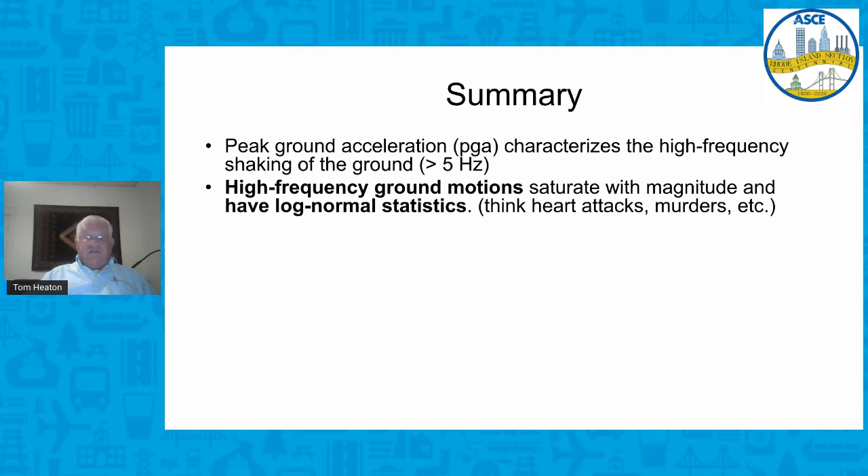And if you look at the statistics of the high frequency amplitudes, the saturation means that we can simulate the probabilities of those motions using standard statistical models, log normal statistics in particular. And this is the kind of statistics that's used in the insurance industry for life insurance for things like heart attacks. You could use them for murders and the like. It's another lecture to talk about why they work so well. They're fairly simple and they make statistics easy. And basically, if it is a normal distribution, all you really need to know are the mean, which in our case is a rate, and a standard deviation. That's what determines a normal distribution.

But low frequency ground motion statistics, the part of the ground motion which is best characterized by, say, the maximum amount that the ground displaces during the shaking, those are characterized by heavy-tailed power laws, which is a different kind of statistical distribution, which is the distributions you see in epidemics like bird flu, or, I made this slide prior to COVID. Obviously, COVID's changed everything. Power laws work for wars. They work for all kinds of, they work for storms, believe it or not.

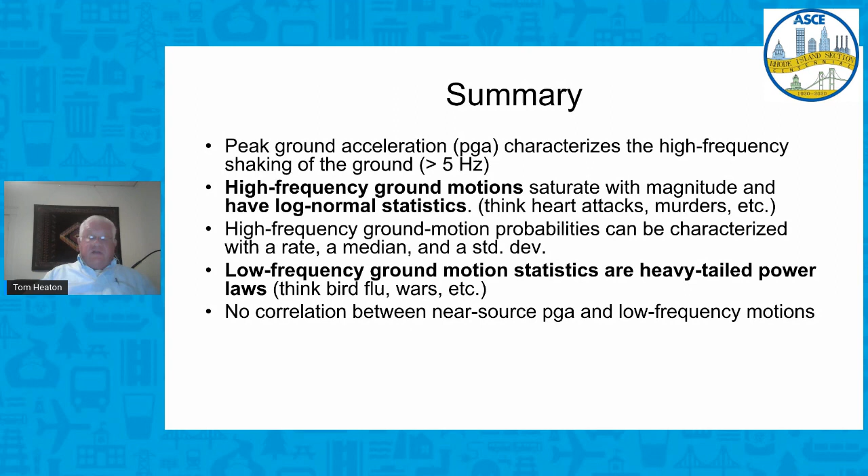And they have very different kinds of statistical properties. And I'll argue to you that when you get in really strong shaking, there's absolutely no correlation between the peak high frequency motion that you see and the peak low frequency motion that you see. They're unrelated to each other.

And so in the United States currently, in probabilistic design of tall buildings, which are long period structures, and base isolated buildings, also long period structures, we use design motions currently that are smaller than is widely accepted within the geophysics community. But since engineers and geophysicists don't actually talk to each other, they go to different meetings and speak a different language, most people don't really understand that this difference occurs.

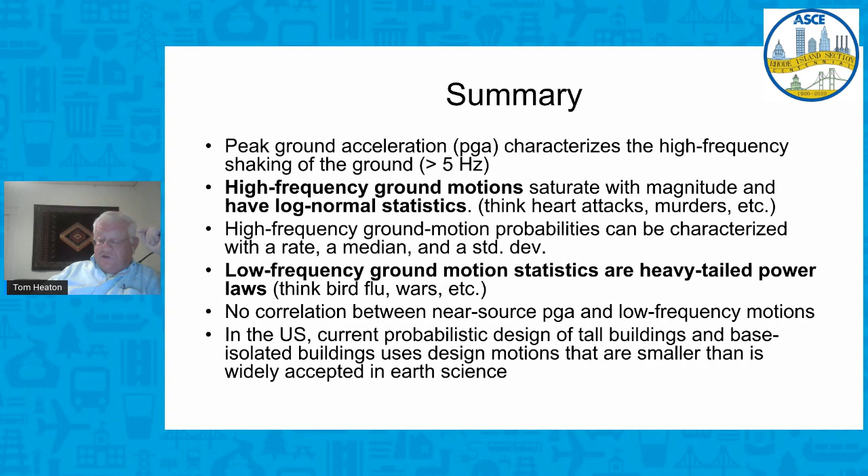So here are the key issues. Although ground motions can occur at any distance and be damaging, I'll concentrate on what happens close to the earthquake rupture, within 10 kilometers of the rupture. It just makes everything much simpler. And it's those close-in motions that are the most violent and damaging.

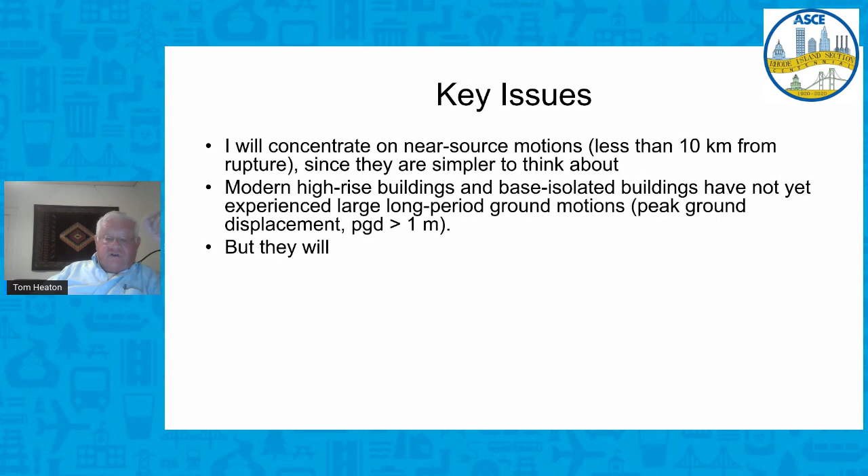And if you look through our history of high-rise buildings, it's a pretty short history. Same for base isolated buildings. I mean, high-rise buildings, less than 100 years, base isolated, less than 30 years. Up to now, we've not experienced any large, long period ground motions where the ground moves more than a meter. And so those systems have worked well, but sometime in our future, and I can't tell you when, they will have large ground motions. It's inevitable. That's the way Earth plate tectonics works, is big earthquakes have big slips.

And the question that I'm going to ask is, is statistical prediction of those long-period ground motions actually technically feasible? And I'll argue that maybe we could do that, but we're certainly not doing it now. And it will look very different from what we're doing for short period ground motions, which is basically what the current procedures are. And my real question is, 100 years from now, will tall buildings, long period buildings, be designed differently than they are now?

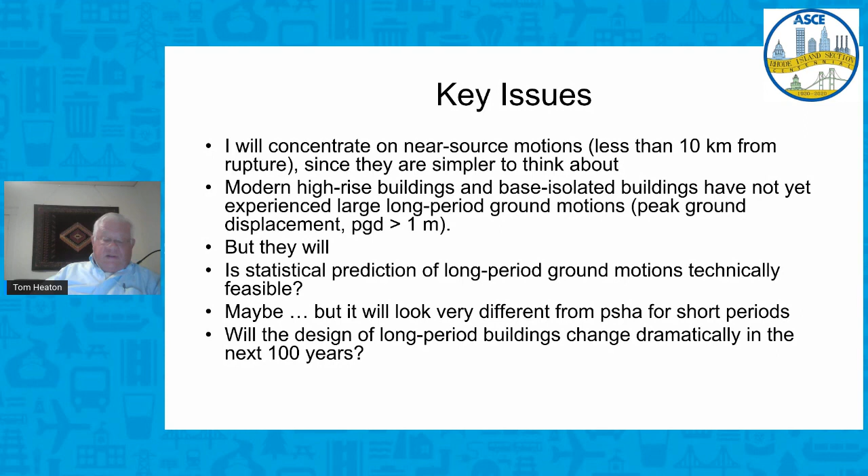And I think the answer to that will just depend on whether or not we have some large earthquake in a city. If we have a large earthquake in a city, no one will pay any attention anymore to performance-based engineering. They'll just say, fix that problem. What were you thinking? And we'll have a completely different way to approach things.

So I apologize. Probably some of these next slides are overly simplistic for you, but let's go through them anyway. So current building codes, building codes are mostly a bunch of rules based on the type of building you're looking at and what kind of seismic zone you're in. And those rules have been developed over lots of decades of looking at earthquakes and how buildings did in those earthquakes, and then fixing things that showed up in forensic studies of the past earthquakes.

And when you look at a building code that's built in that way, in essence, you don't really need to know anything about the earth. You just say, here's what buildings worked well, here's what codes worked well. You don't really need a seismologist to tell you what's about to happen. So that's been sort of the way building codes were done in the past.

But starting especially about the year 2000, performance-based earthquake engineering became popular. And performance-based engineering says, design your buildings according to a statistical model of hazard. So make a model of what's the probability of things happening. And currently the practice is to build so that the expected time between collapse of buildings is 2,500 years, which for most human beings is kind of the duration of written human history. Might as well be infinite, but it's an extremely long time.

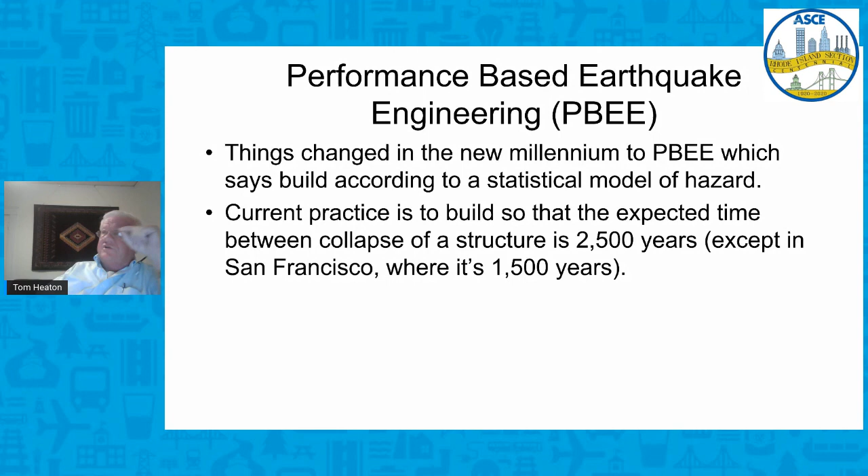But curiously, it turns out that the time for design for performance-based engineering in San Francisco is 1,500 years. And that's a little clue to tell you about what's actually going on here. The reason it's different is because San Francisco's closer to the San Andreas Fault.

If you actually built to the 2,500 years, you'd have to make buildings significantly different than we have in the past. So the definition of what's acceptable was changed just for San Francisco.

Some people claim it correlates with IQ of the earthquake professionals in San Francisco, but I don't know anything about that.

So when performance-based engineering was originally developed, it was advertised as a way to motivate owners of buildings to build to a higher standard than was being used at the time, which now would be the International Building Code, or at the time that we went to performance-based engineering, it was the Uniform Building Code.

Performance-based engineering is utilized in construction of high-rise buildings mainly, and people could use the standard code, but they use performance-based engineering because it typically reduces the cost. That's the way things happen currently.

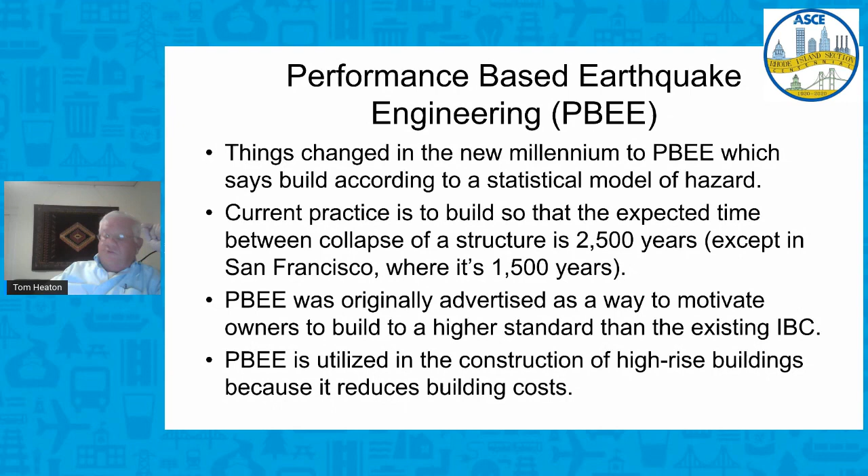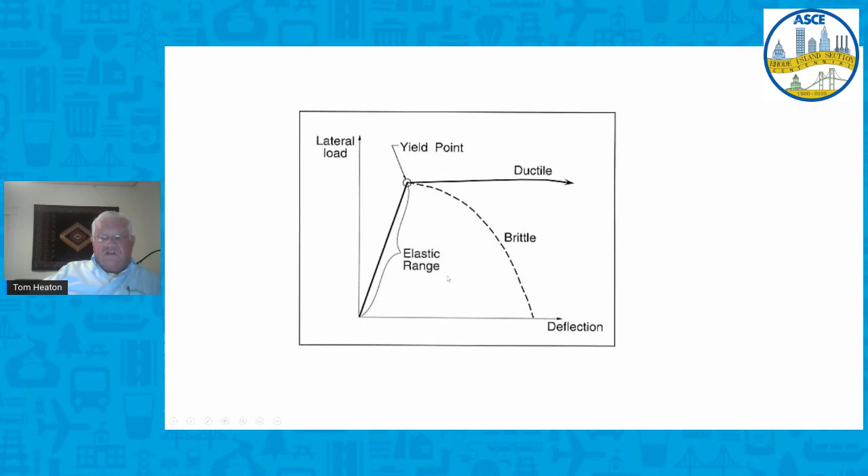If you decrease the load, the building should come back down on a linear line. If the building actually starts to decrease its load, then we call the system brittle, and ductile systems are always better.

So just to remind you, there are all kinds of different building types, but the most common are shear wall construction. Often these are buildings up to about 7 or 8 stories. We've got lots of these at Caltech. Probably the best of them are just simple concrete boxes with holes for windows and doors. These tend to be very high yield strength, very high mass, very stiff buildings.

At the other end of the spectrum are frame buildings where we've got columns and beams. These buildings tend to be used for tall buildings, and they're much lighter and more flexible than the shear wall buildings. You can go in between and put some braces, but I'll mainly talk about these two end member classes.

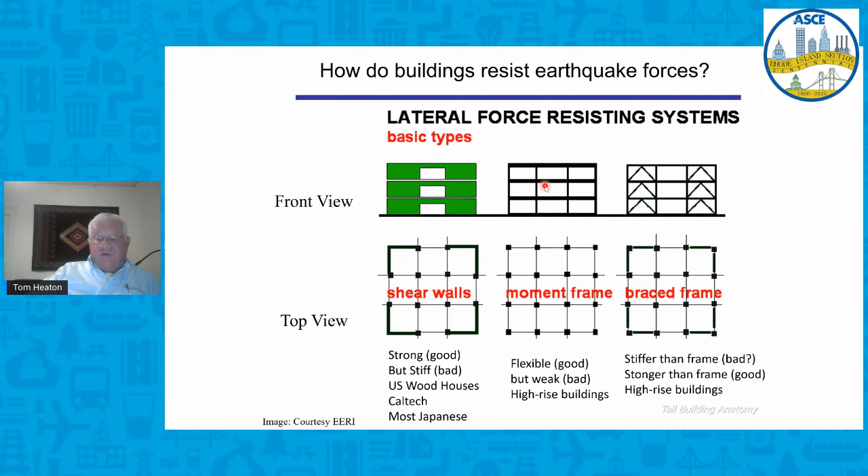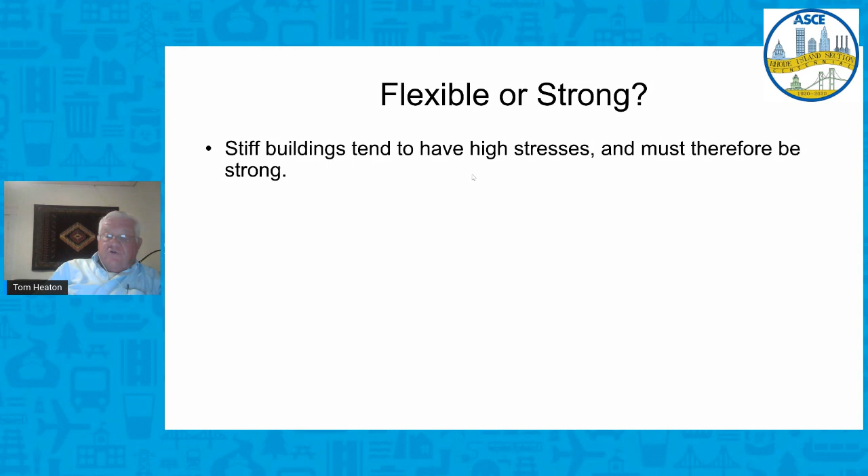So when you go to design a building, often the question is, are you designing a flexible building or a strong building? If you have a stiff building like the shear wall building, since it's very stiff, it makes very high stresses when you try to deform it. It has to move as a unit. And since it has high stresses, you have to make it strong.

But if you make it strong, it tends to increase its stiffness, which increases the stresses, which increases the required strength. It's kind of a vicious circle. If you try to make a building strong, you better make it really strong. People used to think there was a height limit on buildings because they couldn't build buildings strong enough to take the stresses in earthquakes.

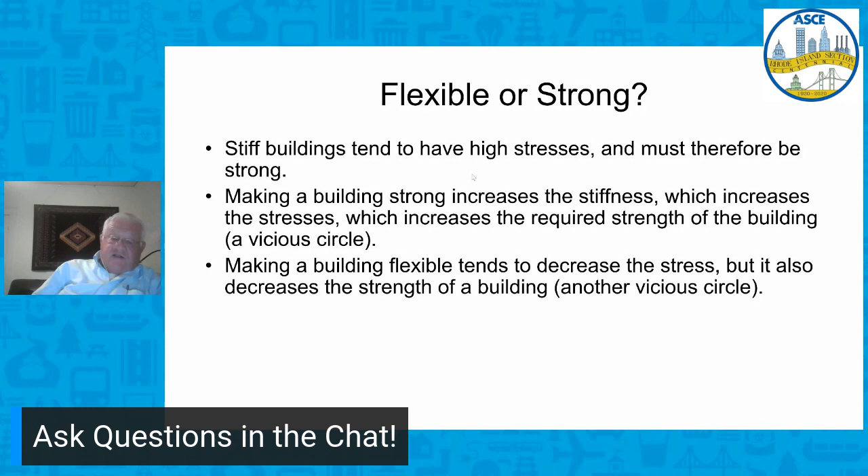But then it was discovered you could go the other direction and make the building flexible. When it's flexible, I'll show you in a second, it decreases the stresses in the building. But that's another vicious circle. The more flexible you make it, typically the lower is the yield strength of the building. So you can make it flexible, but you'll pay a penalty with the yield strength. Tall buildings are typically always designed to be flexible. It's hard to make them strong enough.

It's interesting, in Chile, they have never really gone with this principle, and they have very stiff tall buildings. Now they're going up to 65 stories, I don't know what they're up to.

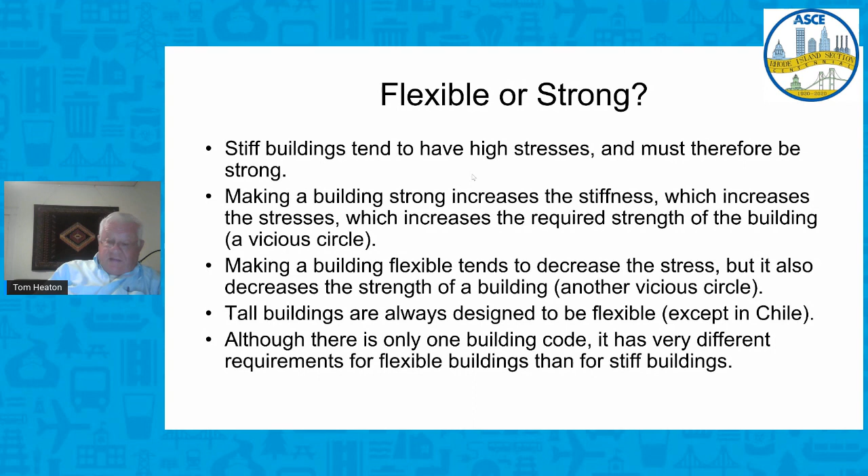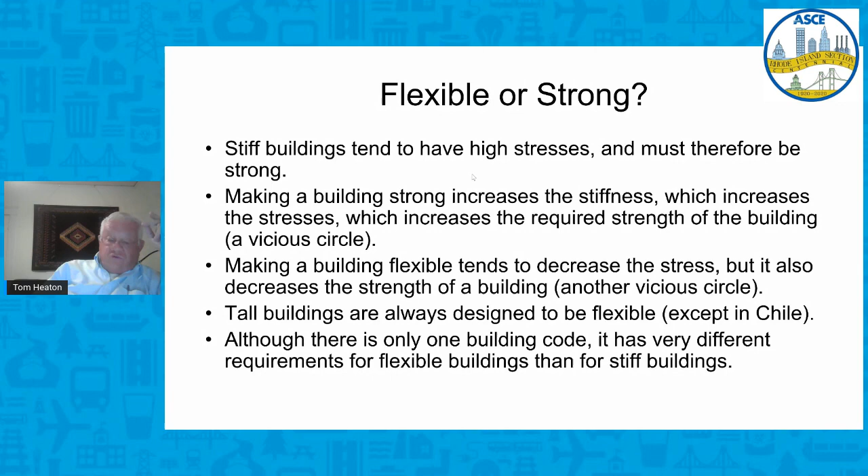Anyway, if you go to the building code, there's only one building code, like the UBC or the IBC, but it turns out it's as if there's two separate codes. Once you decide you're going to go the stiff route, you follow a certain set of procedures. If you go the flexible route, you follow a different set of procedures, and you'll end up with different buildings.

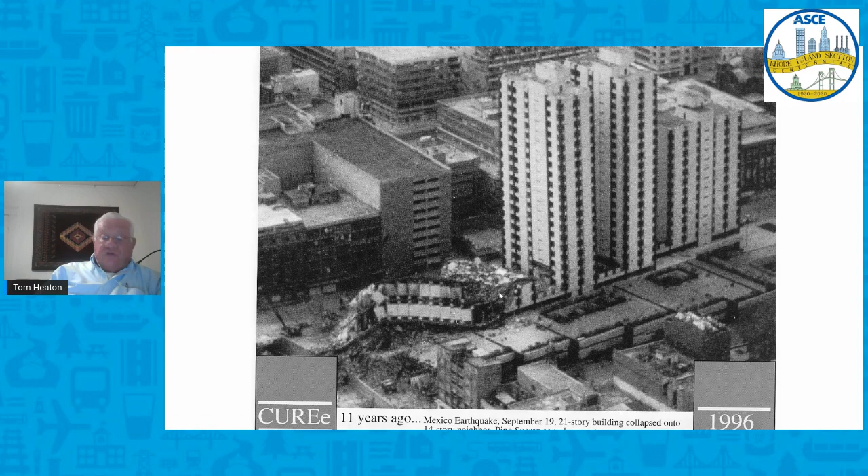So there's something interesting here. It kind of tells you, if you were going to predict what's going to happen to these buildings, they all had virtually the same ground shaking, and you have three very different outcomes. It just tells you how hard it is to actually reliably predict the outcome of collapse of buildings. It's not an easy thing to do.

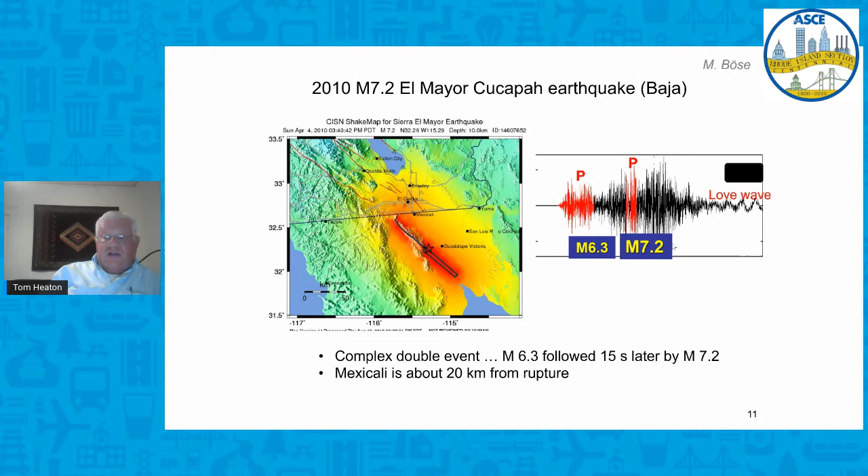You can see there's lots of high frequency shaking in here for maybe about 15 seconds between these two earthquakes. And then later there's something more subtle in this acceleration record, this kind of wavy wave that we as seismologists would call a Love wave. By the way, this geometry is very much like the Haitian earthquake situation.

I'm going to show you a video now from downtown Mexicali. In the background is an 8-story shear wall building, and here's a surveillance camera on a pole. You can see the earthquake starting, and the pole's probably about a resonant frequency of maybe 2 hertz here. You can see it shaking back and forth in that high frequency shaking part of the record. I'm sure you'd be excited. This is what you'd feel mainly if you were standing there. And pretty soon we'll get through the high frequency and get to the low frequency part of the shaking.

Now we're getting to the part where the low frequencies are coming in, that Love wave. And you can see how dramatically different the physics of the low frequency is than the high frequency. That 8-story building was fine, but that low frequency motion would have been dangerous to a tall building. This is just to illustrate the difference between high frequency and low frequency.

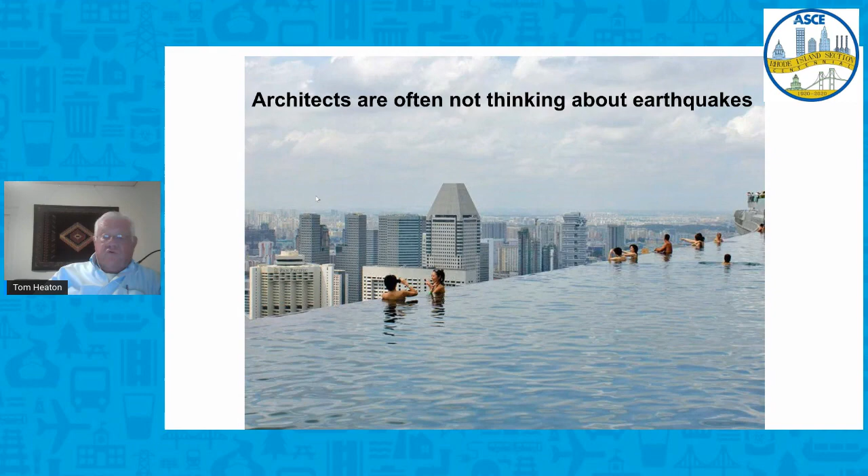I just want to point out that this is an infinity pool from a high-rise building in Singapore. I'm just pointing out, architects are often not really thinking about earthquakes. I don't think you'd want to be in this infinity pool for the kind of motion that we saw in Mexicali.

Mexicali is this city of 1 million people right next to this earthquake. It's not a wealthy city, and the geometry is a lot like Haiti. But it turns out when this earthquake was over, there were 2 fatalities out of a city of 1 million. Wow, they did fantastic. How did a poor city like that do so well?

Well, it turns out in Mexicali, Cemex, the company that does cement in Mexico, had been teaching all the residents how to make concrete block construction, just simple concrete shear walls with reinforcing in them and filling the void spaces.

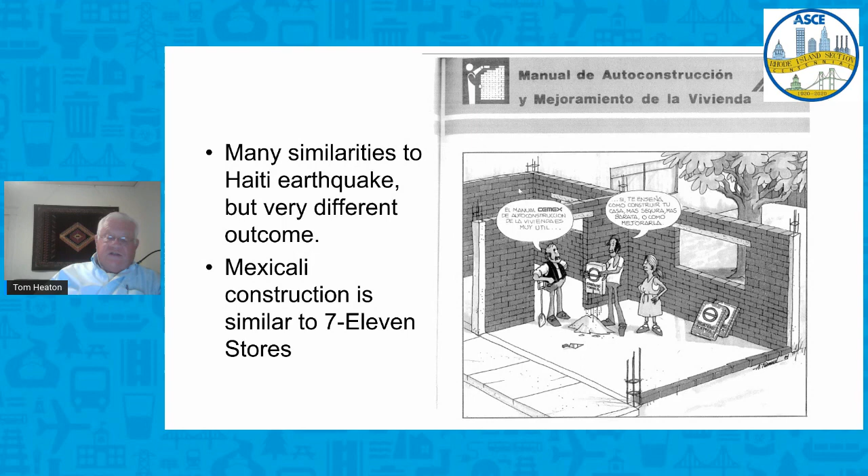The principal thing about a frame building with these moment resisting connections is that when you deflect the building horizontally, you get a flexure of the horizontal beams. That flexure is a kind of spring that wants to restore the building back to vertical, and you won't get that flexure unless these connections at the beams and columns remain perpendicular. So that welded moment resisting connection is critical to the operation of these buildings.

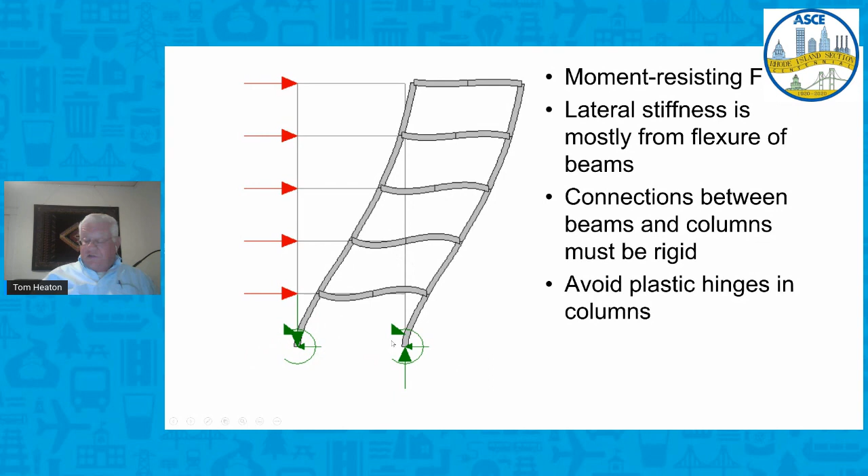Here are some records from a tall building, a 52-story frame building, during the 1994 Northridge earthquake. Along here are accelerograms taken at different points in the building, all on a common time scale. You can see in the acceleration there's a pulse in the middle of the record—this is where most of the force happens during this earthquake. You can see this pulse going up the height of the building, getting up to the top, then reflecting and coming back down. You can actually measure the speed at which this pulse is moving up the building—that's the shear wave speed, about 100 to 150 meters per second.

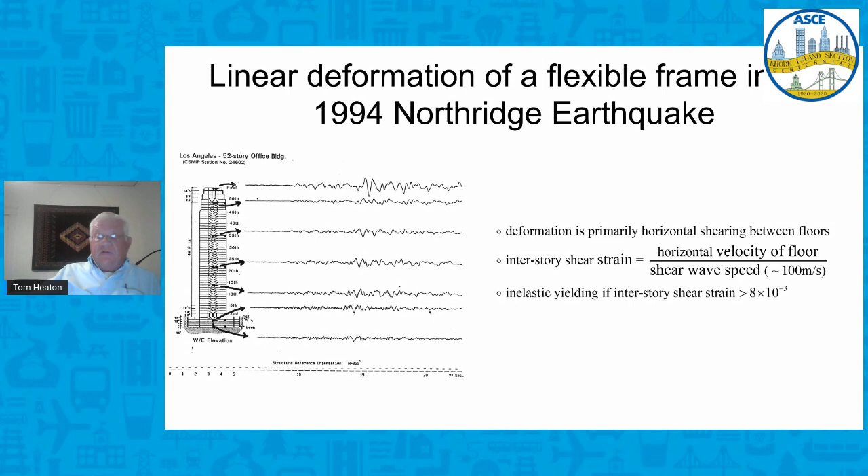It turns out, if you want to know the maximum shearing strain in the building, it's the horizontal velocity of the floor, the ground motion, divided by the wave speed as the building goes up. So if you get a horizontal velocity of a meter per second and a wave speed of... you get a strain in the floors of about 1%. That 1% is large enough to actually cause yielding of the structure. So that's one way to look at this problem.

In steel buildings, it's desired that these steel connections should always stay perpendicular. If the forces get large enough, they're designed to yield plastically in the beams. You don't want yielding in the columns, because columns always have to carry the weight of the building. But if you're going to have any kind of inelastic motion, you'd like it to be in the beams, since the building can have yielding and still survive. So this is the desired behavior of a building.

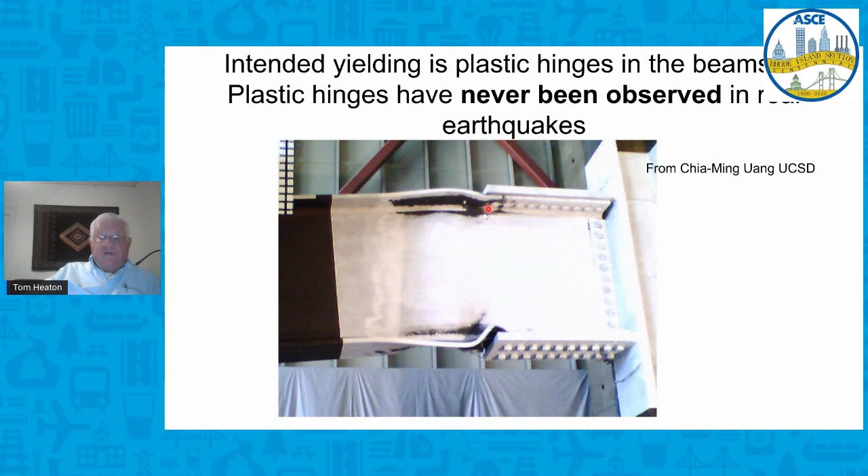But what people found was that when you look at real buildings, no one's ever actually observed this kind of yielding—done in the laboratory—occur in a real building during a real earthquake. Instead, what happened was a great shock: people went out after the Northridge earthquake and found there was no yielded steel, but there were fractured welds in every place they looked where they expected yielding. They went back to the laboratory to see if they could reproduce that.

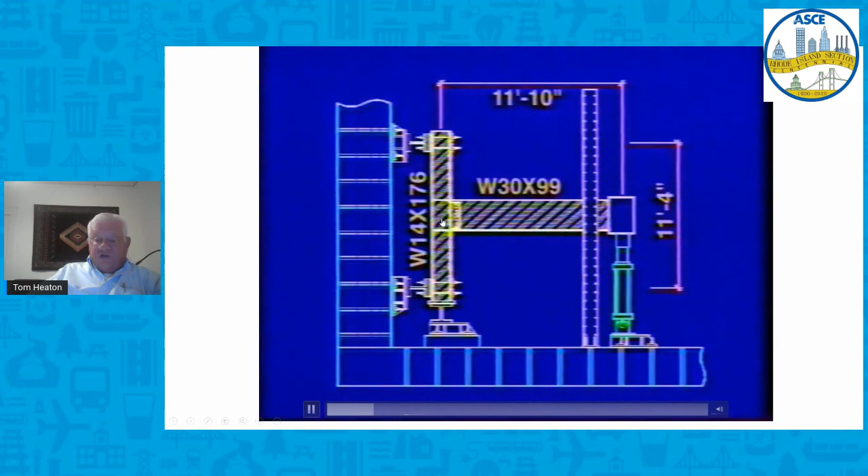This is some tests that were done at UC San Diego by Chia-Ming Uang, one of my colleagues down there, as part of a large project, the SAC project, to study this issue. I'll show you here a vertical column connected to a reaction wall, with the column reacting against the wall, forcing the beam up and down—meant to simulate the Northridge earthquake. Here's the RAM, here's the column, forcing up and down and putting a torque on this connection.

Here's the fracturing of the weld. You can see there was never any plastic yielding in the beam as intended. People discovered that the connections they'd been using up to the time of the Northridge earthquake were actually deficient. It would be another long talk to explain exactly what was going on and how to fix it. Here's just a close-up of that connection failure.

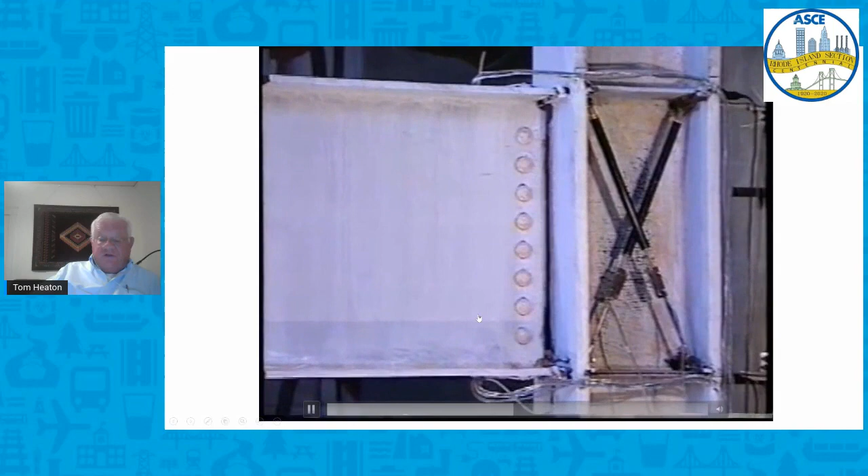Bang. So what you can see, once it does fail, this connection is now basically just a simple hinge. It has no torque resistance, and it's a huge problem for these buildings.

So in order to better understand this problem, my colleague John Hall and his students made some pretty sophisticated finite element codes that would deal with large deformations of steel frame buildings. He tested those against a variety of different cases. One I'll show you is something called U20.

U is for United States, 20 is 20-story. The building he looked at was designed for the 1994 UBC for Los Angeles and San Francisco. It's a 3.5 second free period of this building. He also designed the same building to the Japanese building code of 1992. The Japanese code is written very differently than the US code, but when you're done, it ends up with a stiffer building that's got higher yield strength and a 3 second period. This code ends up being similar to our International Building Code, IBC, with the highest near source factor—similar to the best we're doing in the US.

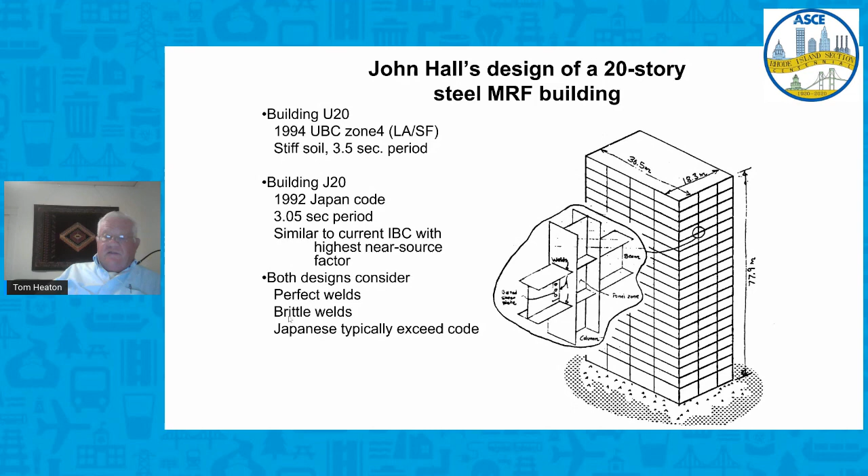For both of these buildings, there are cases where the welds are assumed to be perfect—they never fracture—and cases where the welds fracture, similar to what was actually seen in real earthquakes. By the way, in Japan the building code is more conservative, but they typically exceed their building codes. That's because construction companies there tend to maintain identity and ownership with buildings throughout their lifetime. It would be a tremendous economic blow for one of their buildings to be badly damaged in an earthquake, so they do everything they can to avoid that.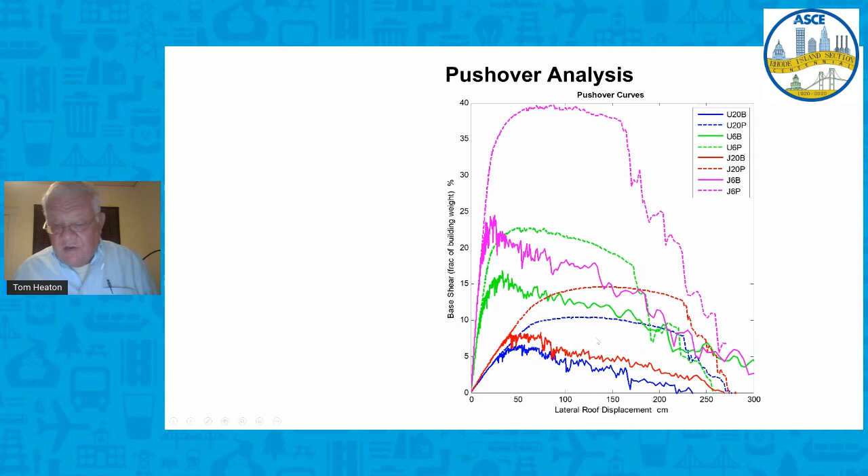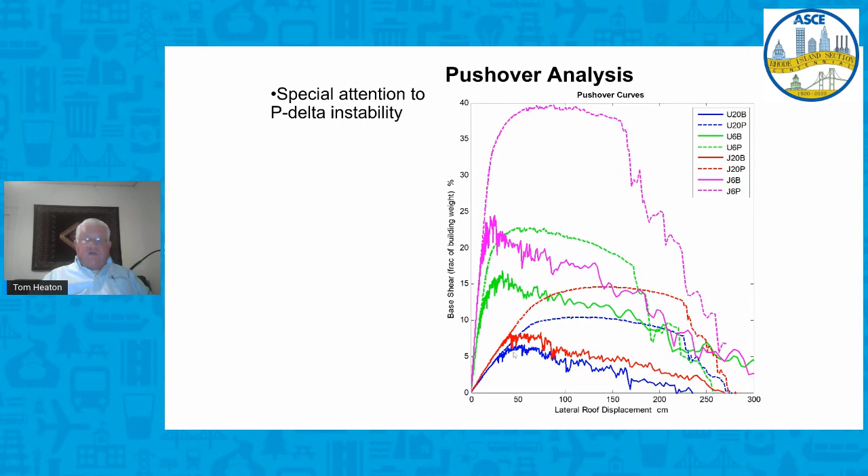Notice the Japanese code building, this one in red, is up at about 14% of its weight for its yield strength—that's their higher strength and higher stiffness, you can see that in this curve. So I'll mainly be looking at this 20-story building and also some at the 6-story building. This code was especially designed to keep track of what happens to the building in large deformations. If you get enough horizontal deformation, gravity wants to bring the building down, so ultimately you've got to have a mechanism to collapse it.

In this case, it's a side sway story mechanism. And in these buildings, whether Japanese or US, 2 meters of roof displacement, once it gets to that, is enough that you're going to have a collapse of the building.

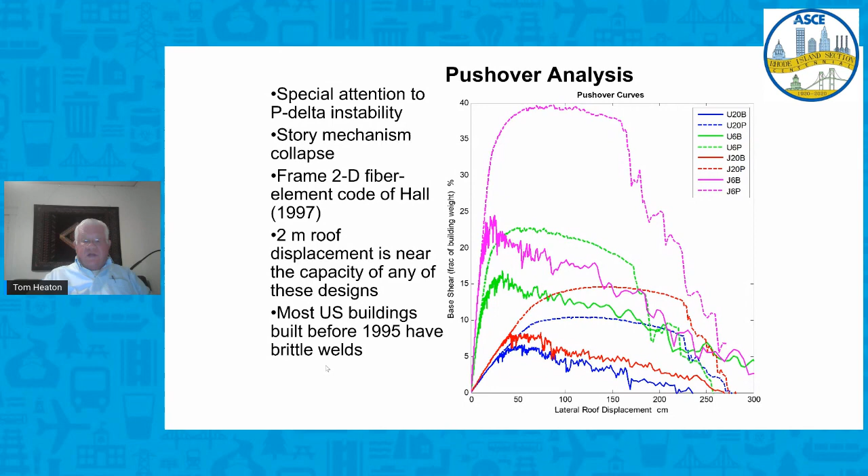Just to remind you, almost all buildings in the US built before 1995 have brittle welds. This is not a problem that's been fixed. The newer buildings don't have brittle welds, but all the older ones do.

So here's how it collapses in the earthquake in this situation. This is the frame of the 20-story building at time equals zero. We're going to see it displace the ground to the left by about 1.8 meters.

The top is trying to catch up with the base, so the base is preceding it. And you can see these little triangles in the model - those are fractures in the welds of this building.

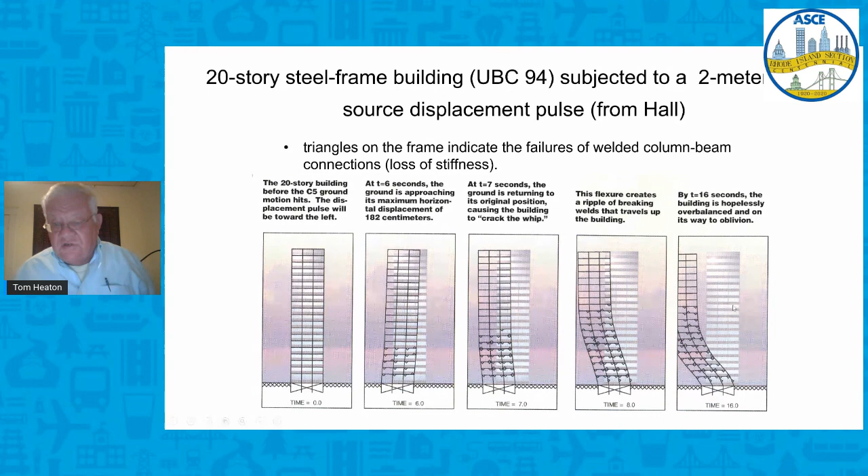At 7 seconds, the base is starting to move back - it's a pulse that goes over and back. The top continues to move left. At 8 seconds, the base is almost back. By 16 seconds, the base is back, but the top just continues to move to the left and collapses. So that's the collapse mechanism in this model.

We took that model and ran it through ground motions we think are similar to the 1906 San Francisco earthquake. Of course, we didn't have strong motion records from 1906, but we have lots of data about offset of the ground from geodesy and surveyors. So we know what the slip on the fault was, and we know a lot about how faults slip in earthquakes. We made simulations of what the ground motions would be like on a finite element grid.

And then ran 4 different buildings through those simulations. This plot shows the maximum drift of the building in color - anything up in the red signifies collapse. On the left are Japanese code buildings, on top are the brittle welds, and on the bottom are the perfect welds.

The worst of those buildings was the US code with brittle welds - you can see huge areas where you'd expect collapse. The same is true for the Japanese building, it's better, but the brittle welds really affected it as well. The best is the Japanese code with perfect welds. But even with perfect welds, the US code building shows lots of collapses.

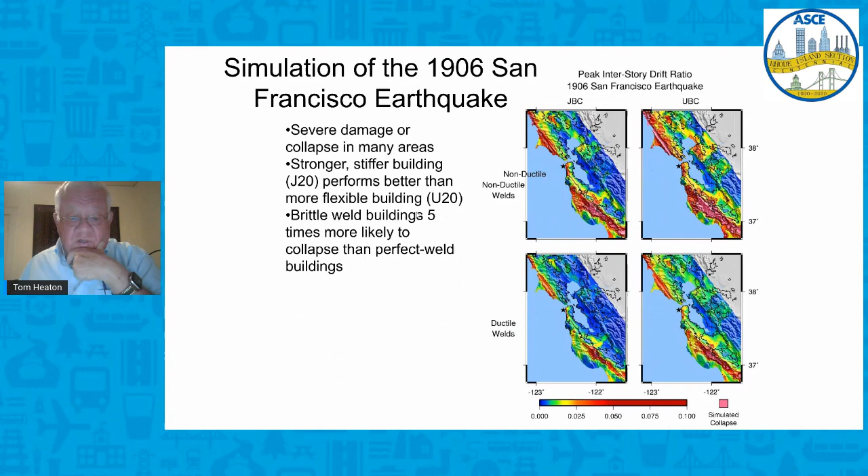It's interesting, this simulation only considers up to soft rock sites - there's no bay mud or amplification due to the Bay Area sedimentary deposits, so it's probably worse than what you see here. It shows severe damage or collapse in many areas. The stronger, stiffer buildings do well - brittle weld buildings are 5 times more likely to collapse than the perfect weld buildings.

We ran a similar simulation for a magnitude 7.3 on a fault we all fear in LA, called the Puente Hills Blind Thrust Fault, which runs right beneath downtown Los Angeles. We put buildings everywhere above the earthquake, and in the basin the ground motions are worst - you'd expect to see collapse of our 20-story US code building with good welds in a large part of the Los Angeles basin.

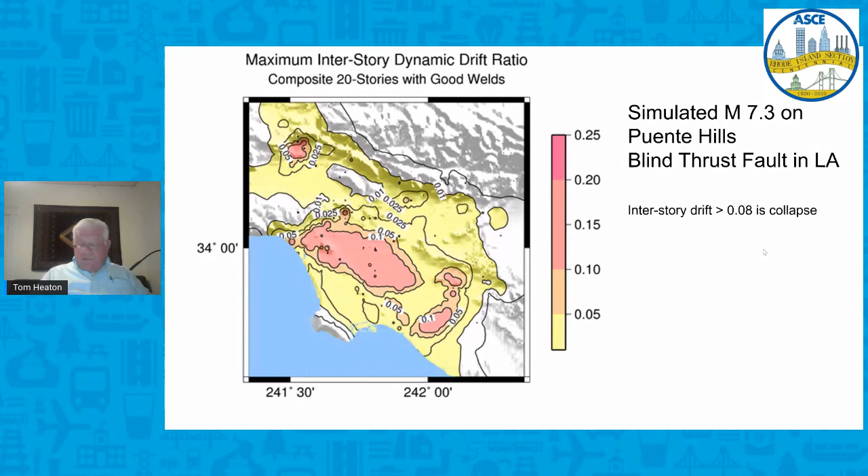So this is kind of our worst case scenario. And I certainly hope not to live long enough to see that ever happen.

We actually ran through thousands of different simulated ground motions of large earthquakes, and looked at when we saw collapse and when we didn't. For each simulation, if we saw collapse, we made a red dot. You can see lots of red dots here because there are 64,000 different synthetic records. Each record plots the maximum displacement of the ground versus the peak velocity of the ground.

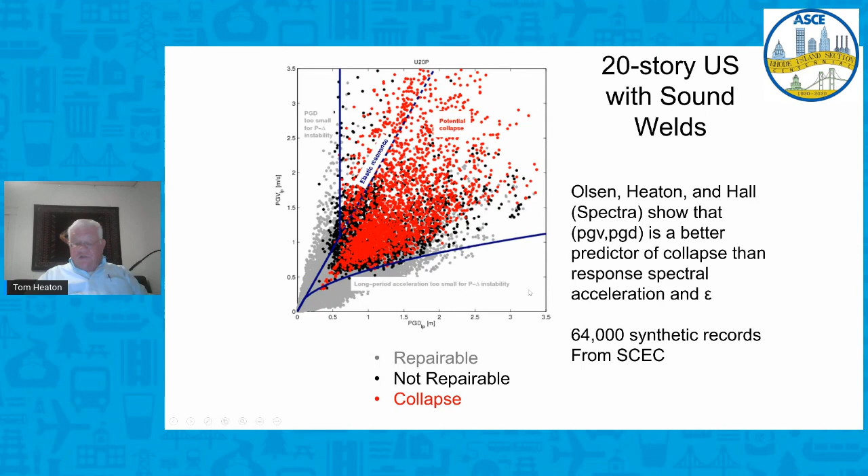You can see that when the velocity is more than about 60 centimeters per second - here's the line for velocity, and here's the line for displacement - it looks like you need the combination of both large displacement and large velocity to see these collapses. In fact, you can turn this into a probability model of that same data, with separated lines for collapse versus non-collapse.

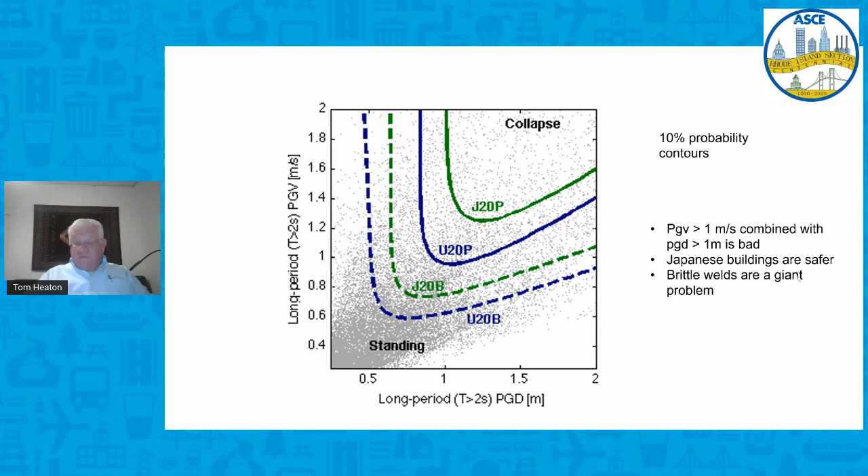So really you don't want to see in a city peak ground velocities more than a meter per second combined with peak displacements of a meter. And brittle welds are a huge problem.

All right, so how does this relate to what we currently do? We currently use elastic response spectrum, and it's not used too much anymore, but people still, when they talk about ground motions, they take linear motions, 5% damped linear oscillator. This is just the force displacement curve for a linear oscillator that we would currently use, something like this linear line.

And then people realized, well, it's going to yield and we're going to have ductility. So the ductility in the system is the displacement at which the thing collapses divided by the displacement at which it first yields. And that in the system used to be called the R factor, the reduction factor. People would use the response spectrum of the linear system and reduce the required forces from this linear system down to a design system for a ductile system using this R factor.

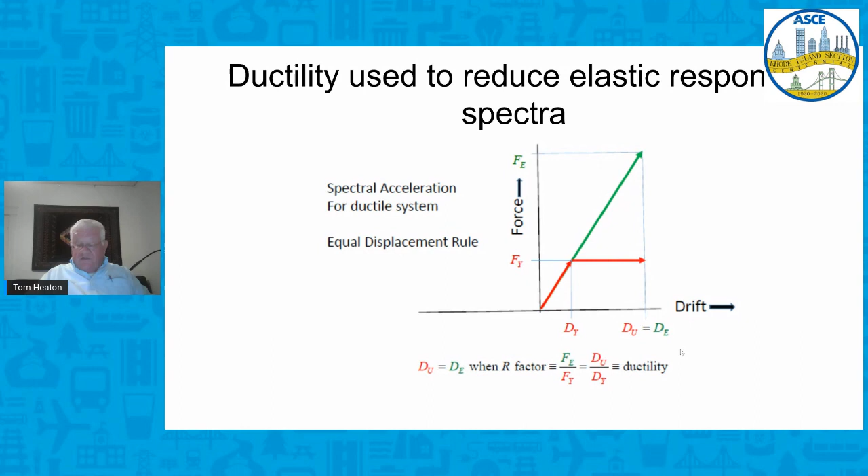It sort of makes sense, but the problem is that if the oscillator is deflecting out to this point, the stiffness of the system is the slope of the line, and the effective stiffness really decreases for large displacements.

And so you expect the periods of the building to lengthen when it starts to yield. But even more importantly, if there's no damping in the system, it just goes up and down this linear line. If there's damping, then the area inside one of these hysteretic curves is the damping. And if you have large ductility, you expect to see large inelastic work, large damping in the system.

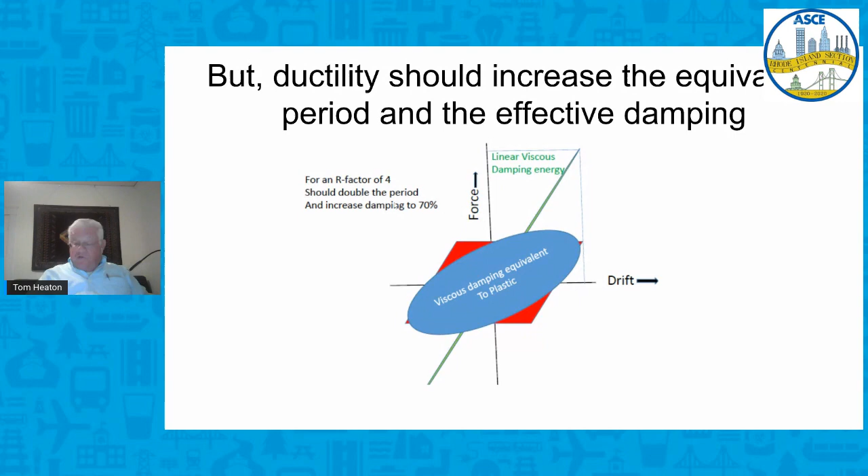In fact, if you have a ductility of 4, an R factor of 4, you would expect to see the equivalent damping up near 70% of critical damping, and currently people use 5%, which is completely different.

So here's an interesting analysis where we took ground motion and put it into the 6-story building to see when it would collapse. Here's the ground acceleration. This is 100 seconds of acceleration. It's got high frequencies and low frequencies.

We increased the size of the motion. This is a real motion. We ran it through the 6-story building and slowly increased the acceleration, just scaled it up until it collapsed the building. This is the motion that would cause collapse, and it'd be 68% G acceleration in this record to cause collapse.

If you did the standard thing to this, you'd end up with this motion here. This is the standard linear response spectrum.

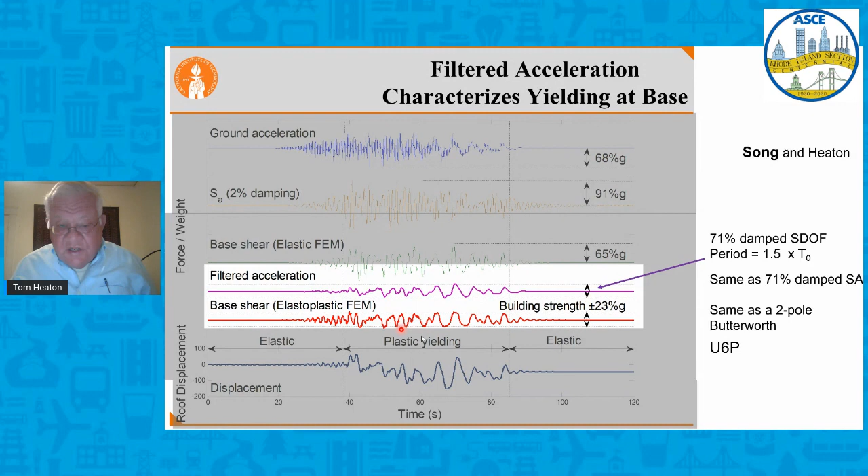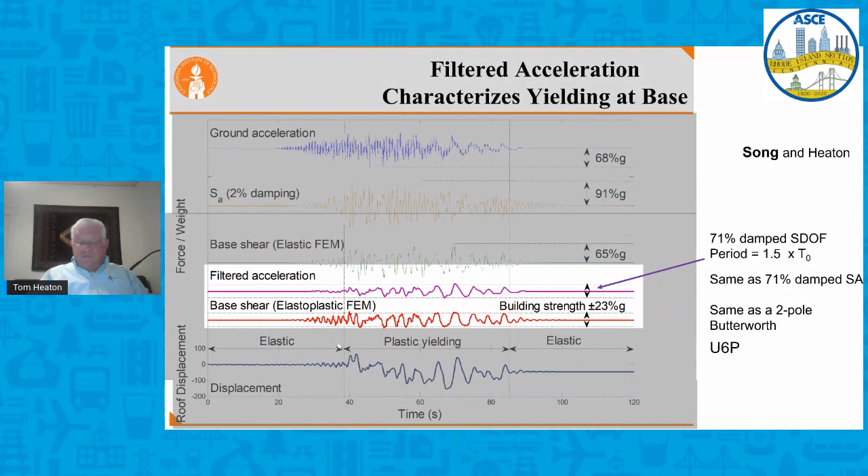If you used a 70% damped motion, then you end up with this basal shear out of a response spectrum. This is the plastic motion that actually caused it to collapse, and you can see these two look very much like each other. What this is really telling us is that using a 5% damped response spectrum is just completely inappropriate. We should be using a 70% damped response spectrum.

I'm going to stop this part because it's too complicated. So here's now where I want to talk about high frequency and low frequency motions in earthquakes. Peak acceleration is the high frequency part, and it's what we usually talk about, but it turns out it means nothing for these long period ductile structures.

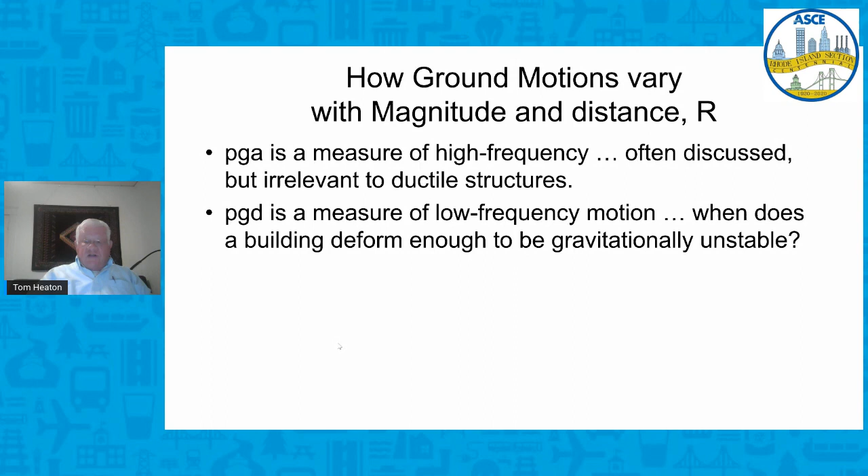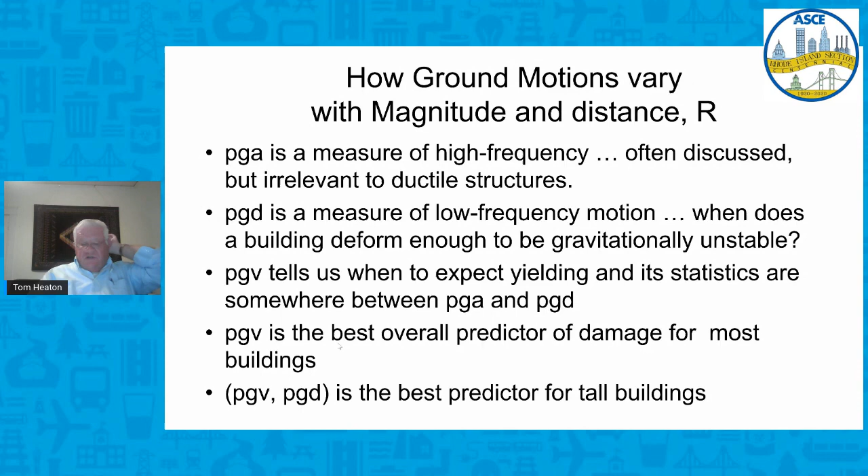It's the peak displacement and the peak velocity that are more important. And if you want to know the best kind of overall predictor for most buildings, it's usually peak velocity. But for the tall buildings, it's the combination of velocity and displacement.

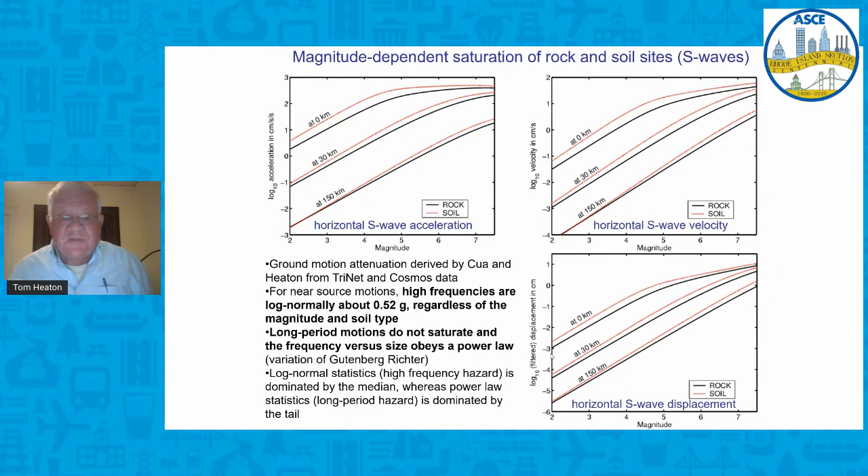So this is saturation of the high frequency acceleration as a function of magnitude, and it saturates at about half a G. If you do the same thing for velocity, it has a kink, but it doesn't saturate, and the same for displacement. So the displacements and velocities continue to go up as a function of magnitude. That's why we call them large magnitude earthquakes.

And if you just take all the records that we have available to us, and for each record you plot the peak acceleration of the ground on the vertical axis versus the peak displacement of the ground, you'll see that there's a big scatter. The two are sort of related, and they correlate sort of, but only up until you get up to this region, then everything flattens out.

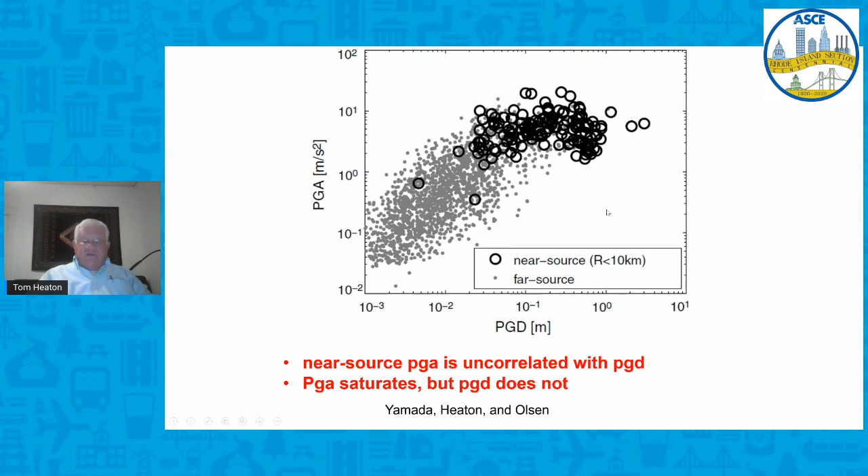And these are the near source records less than 10 kilometers from earthquakes bigger than magnitude 6. And you can see that for these close-in records, there's no correlation whatsoever between the peak acceleration on the vertical scale and the peak displacement on the horizontal scale. So peak acceleration doesn't tell you anything about the long period ground motion.

So if you take those near source ground motions and you make a histogram of the number of data points as a function of the log amplitude of the peak acceleration, this is the histogram. It looks like a bell-shaped curve, and this is what it looked like prior to the Chi-Chi earthquake, which had lots of data, and the median was 464 centimeters per second squared, half a G. Actually, it was about the same before and after.

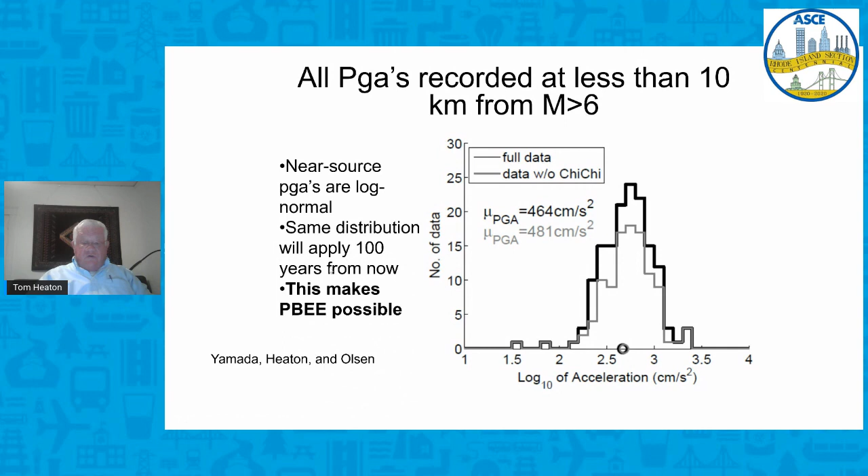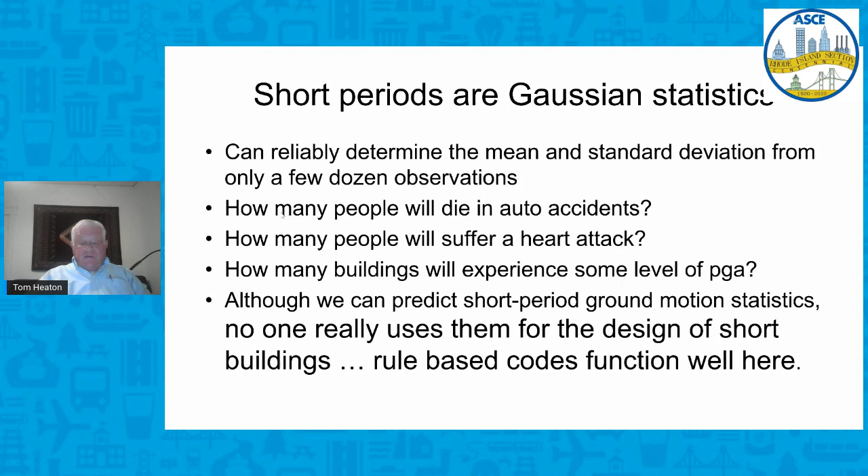And what this tells you is that, yes, the high frequency accelerations in close are a log normal distribution, and all you really need to know is this half a G and the standard deviation, a factor of 2. And that's what it looked like every time we get new earthquakes. We just get more data, but we get the same answer. And it's this feature that really makes performance-based engineering possible. We call it Gaussian statistics, normal statistics, and you can reliably deal with that distribution.

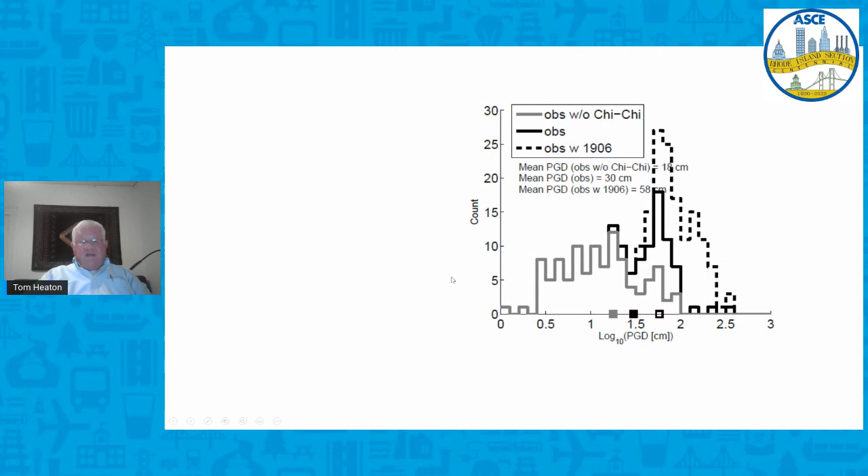Here's the same distribution for displacement, and you can see that that's not a bell-shaped curve. And here was what the median was prior to the Chi-Chi earthquake. Here's what it was after the Chi-Chi earthquake, because it added a bunch of big long period motions. And if we were to have a repeat of 1906, this is what it would look like. So if you want to predict what's it like in close to a big earthquake, well, good luck. So this kind of distribution is a power law distribution, sometimes called Pareto distributions, and they're really tough to deal with.

So, for instance, Pareto distributions are for wealth in a society. And if you wanted to know what's the total money in Rhode Island, we could go here at this talk and ask what the mean incomes of the people here are, and multiply by the population in Rhode Island, and come up with an estimate of the total wealth in Rhode Island. You know that wouldn't work because it really depends on the richest people in Rhode Island. People have known for a long time that the action is in the tail of the distribution.

And this is true for all kinds of problems, like how many people will die in wars? No idea. Pandemics, no way to do that. What's your stock market really going to look like in 20 years? You think you know, huh? So it turns out that in these kinds of Pareto distributions, if they're a power law, you can't even integrate them, and you can't turn them into a probability distribution function because the power laws are not integratable.

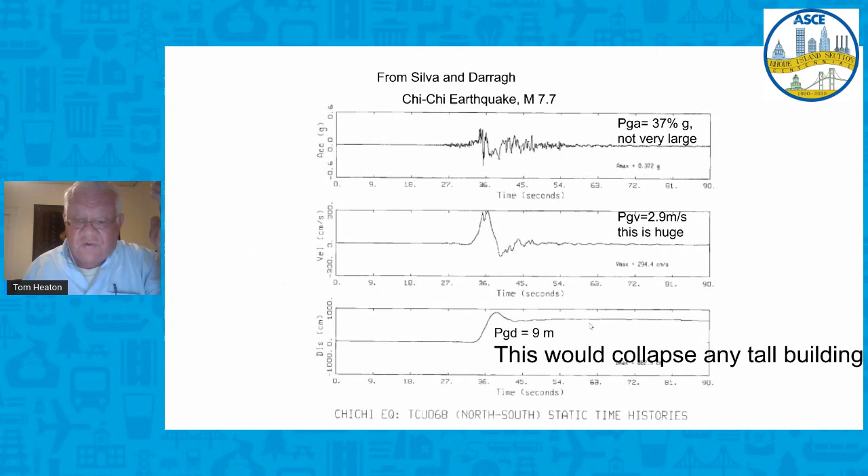The ground was moving by a couple of meters here at 2-second periods. And these ground motions would demolish virtually any high-rise building on the planet. It's really amazing ground motions. I don't have time to go through that.

Let me just say, right now, most of what we're doing is based on a bunch of records that we've got available to us. And we've only been taking records for basically 50 years, but there's lots of eyewitness accounts of earthquakes. For instance, in 1906, redwood trees were routinely snapped about 10 meters from their base. Redwood trees are pretty resilient to vibration.

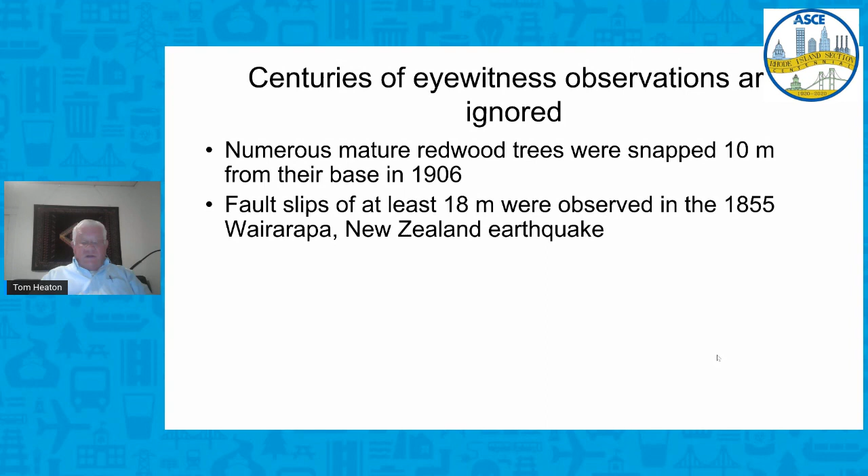There were 18-meter slips in an earthquake in New Zealand, and just lots of amazing accounts of what it's like to be in close to a large earthquake. But there are no records of it, so they're not included in any of these 2,500-year analyses.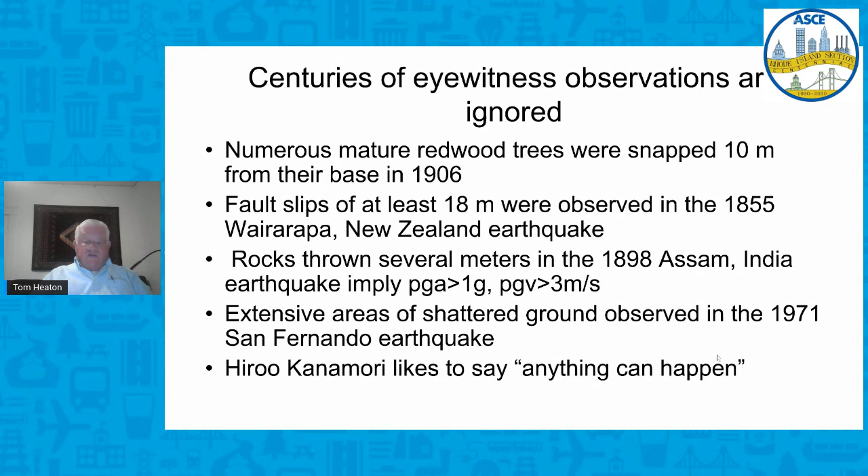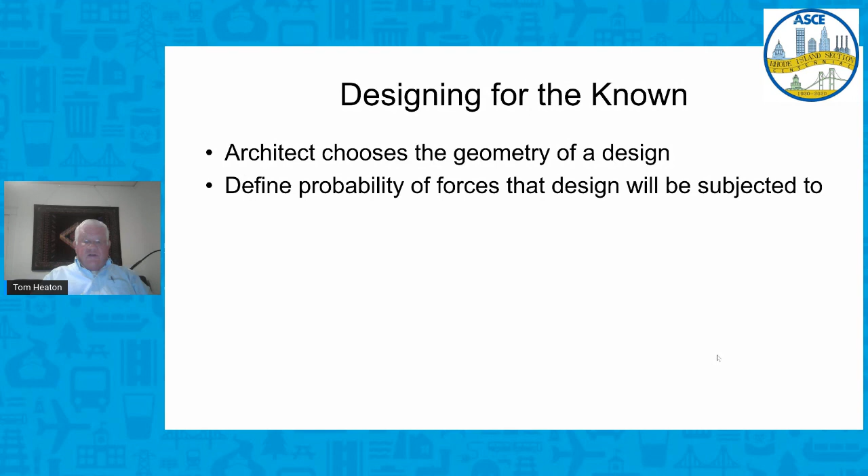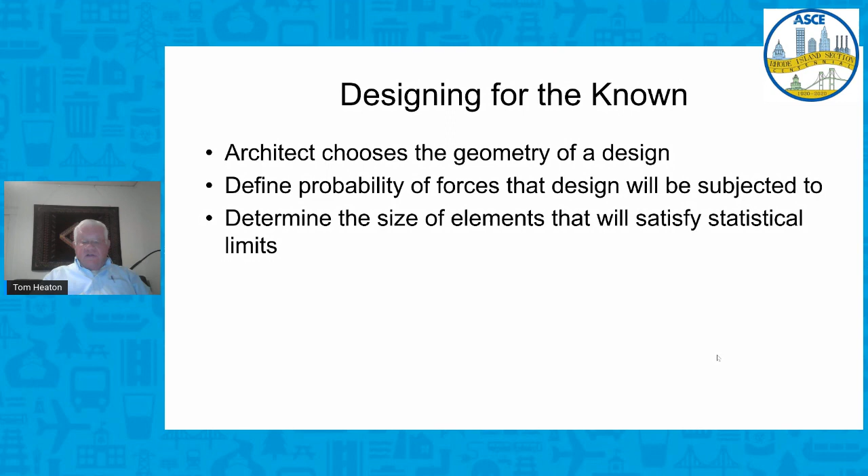So just to kind of get to the end here, designing for the known: the architect gets in there early, chooses the geometry, and then we define the probability of forces that the geometry will be subjected to. And the structural engineer then decides how big to make the building.

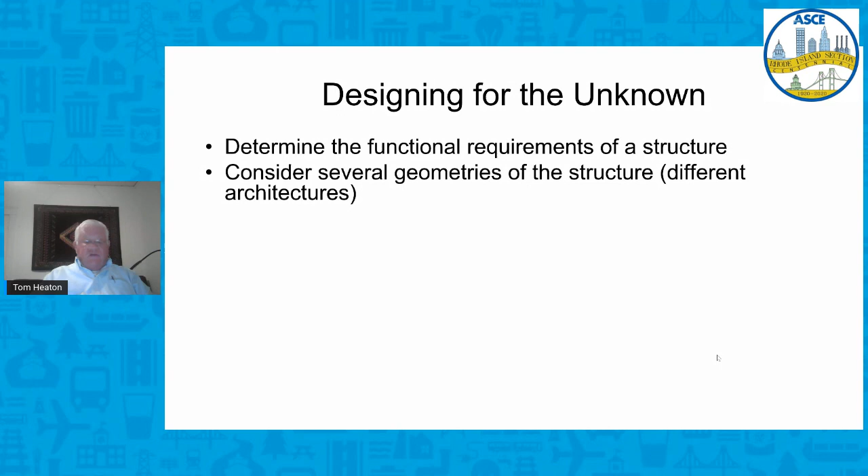Performance-based design is a different way to go about this problem. It's to admit that we can't do this problem and just start with, well, what does this structure need to do? What are the functional requirements? Consider several different designs, you could even ask an architect to do that. Determine the cost of the different designs, and then just make a judgment. What are the strengths and weaknesses of the different designs?

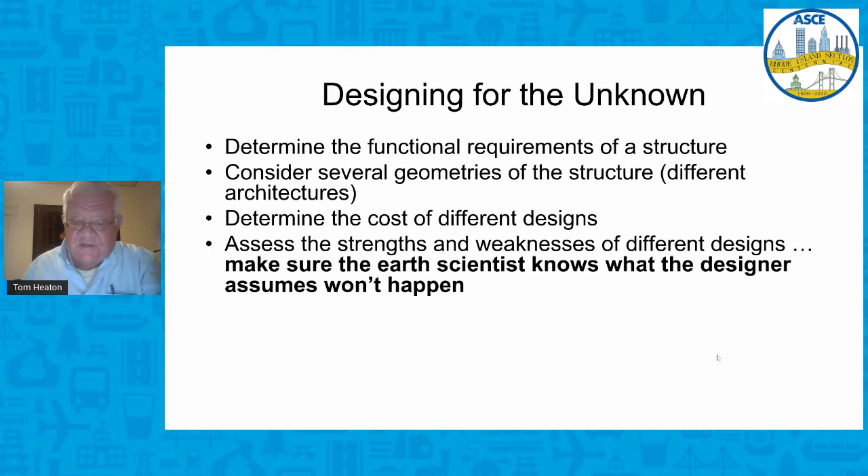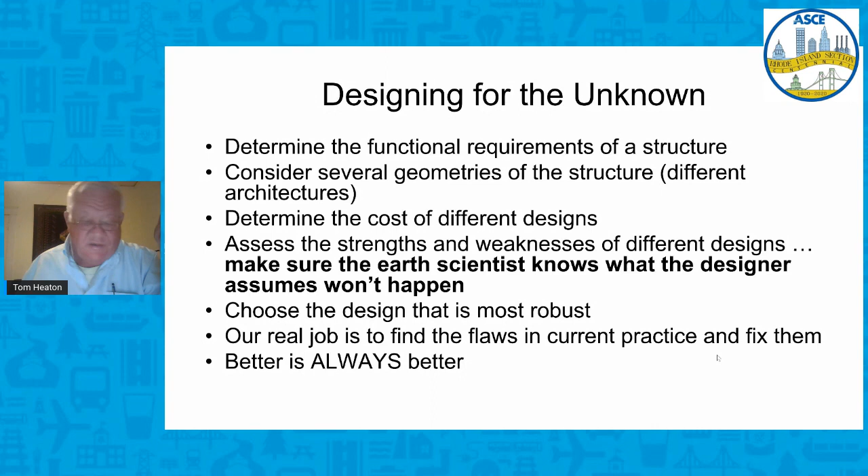And then when you're done, figure out what the actual capacity of the structure is, and then run it by the earth scientist and say, does this make any sense? And choose the design that's the most robust. And our real job is to find flaws in the current system and fix them. It's not to design to the 2,500-year ground motion. And any improvements you can come up with to make things better, that's good, because it's always better.

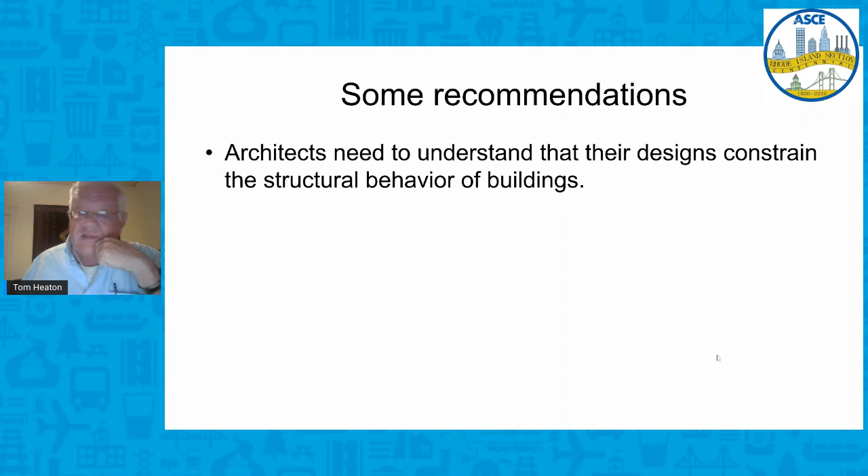One of my main lessons is that architects need to be brought in early, and make them understand that the things they design have important constraints on buildings. And this idea of telling the public that a building is designed for 2,500-year shaking gives the message that we can compensate for any unreasonable form that the architect could dream up.

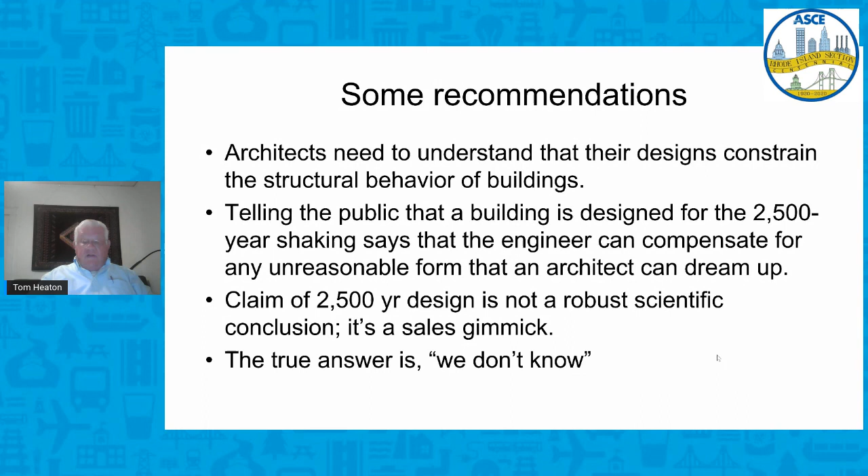It's just not true. This claim of 2,500-year ground motion, it's not an actual robust scientific conclusion. In my opinion, it's a sales gimmick. It's a way to get people to say, don't worry about it. Everything's taken care of. The real answer is we don't know.

Sorry, I went the full hour here. So thank you. Trying to see, do we have time for any questions at this point? I can't hear you, Chad. Sorry. Sure. I think we've got time for a couple.

Leading off that last slide, I think the big question is, how are designs like that permitted? Well, so one of the suggestions has been sort of don't allow really tall buildings. And it gets back to a very deeply philosophical question. Right now, the public wants to be told this is safe. But if you choose a tall building, you cannot make that statement.